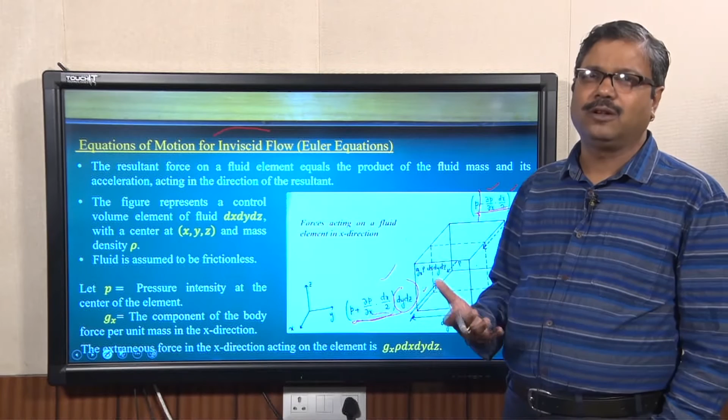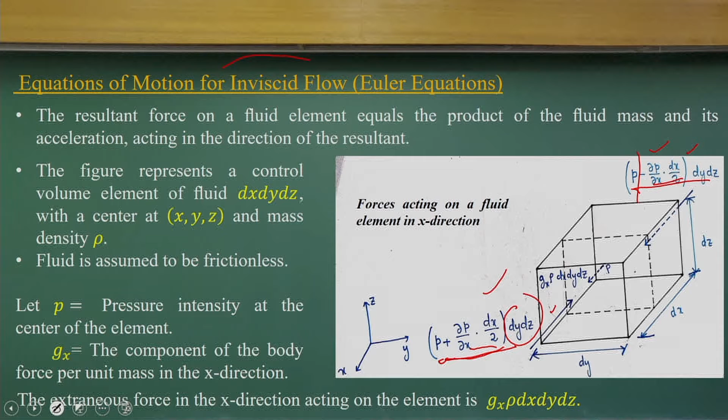Using Newton's second law of motion, the sum of forces acting is equal to mass into acceleration, which we know. So the same thing we have applied for this control volume, as it has pressure variability and velocity variations. Considering that control volume, we got these derivations. If you look at it, it's a very simple derivation: the pressure force equated with the gravity force component, that is equal to mass into acceleration.

The acceleration component has a local acceleration and a convective acceleration. More detail about local acceleration and convective acceleration you can follow in any fluid mechanics book on fluid kinematics, and try to understand how interesting it is to know what local acceleration and convective acceleration are.

That is equal to the force due to pressure imbalance, per unit mass, that is the reason we have this term. Then you have the gravity force component. Since it is three dimensional, in three coordinate directions, we can write this using the same Newton's second law.

So we can have three linear momentum equations, the only difference between these being the first one for the x direction, then y direction, and z direction. If you look at u, v, w, those are the things changing, and the pressure gradient is in the x direction, y direction, z direction, with the acceleration component in the x, y, and z directions. It's a simple force equals mass into acceleration, which is what we have applied.

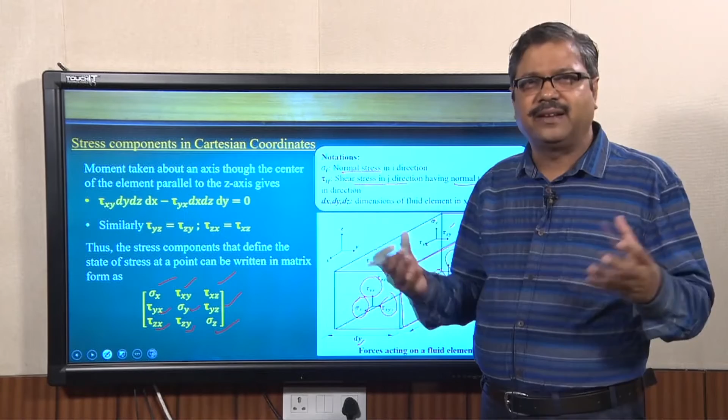So for any infinitely small control volume, if you consider dx, dy, dz, we can define the stress components on all 6 facets, all 6 surface facets. This is valid for solid mechanics and also valid for fluid mechanics. So for any small solid object, you can define the stress field like this, the stress tensor with 9 components.

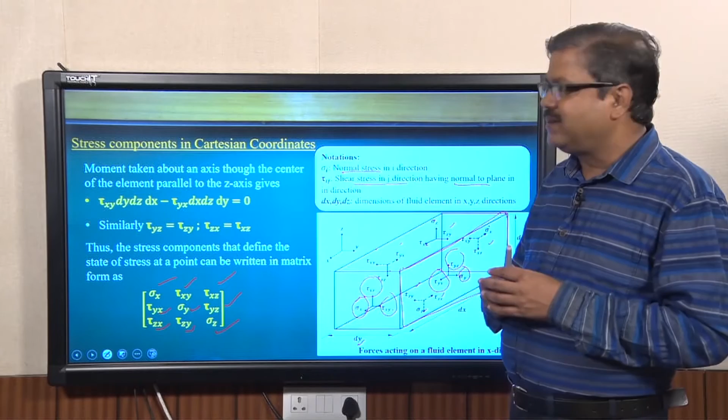But in some cases, if I take a moment about the axis through the center of the element, I can write this part, which means I am equating the moment. Going through the axis at the center of the element, I get force into distance, force into distance. If I equate this, I get tau xy is equal to tau yx.

The same concept can be used for other facets to find tau yz equal to tau zy, and tau zx equal to tau xz. So that means instead of 9 components of the shear stress matrix, we only need to consider 6, because the other 3 are equal to these.

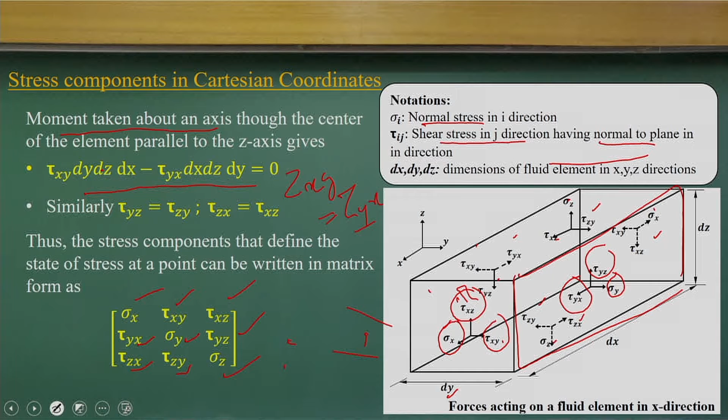So tau xy is equal to tau yx, tau xz is equal to tau zx. So we only have 6 unknown stress components. That is the simplification we do for this infinitely small control volume.

Now if you understand this concept, it becomes very easy to derive the Navier-Stokes equations, because we have considered an infinitely small control volume, and over that we have defined the stress field. Now we have to define it. The stress fields we defined in 6 components are also continuous functions within that. So again we can follow the Taylor series approximation for different facets, to find what the value would be if we know it at the centroid.

For example, if you look at these figures, I am looking at the sigma x variation at a distance of dx by 2 on the surface. If sigma is known at the centroid of this infinitely small control volume, then at dx by 2 distance it will be sigma plus the partial derivative of sigma with respect to x times dx by 2. That is the Taylor series approximation.

Exactly the same way as we did for the u and v components, we do the same approximation for sigma as a function varying in space and time: knowing the centroid value, we can find the value at dx by 2 on the positive side or dx by 2 on the negative side. This means we can know what force components are acting in the x direction, including normal stress components as well as shear stress components.

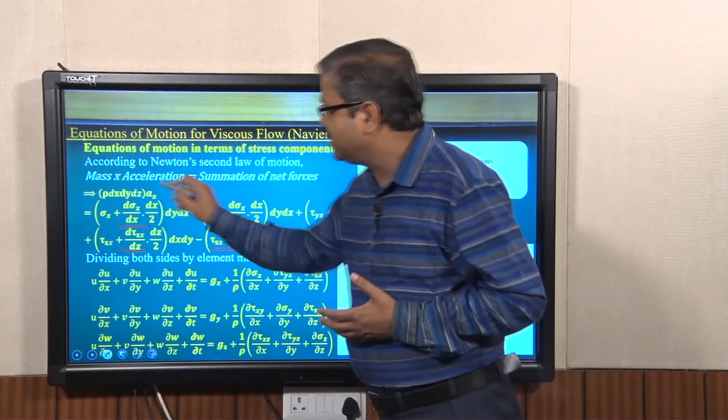That should be equal to mass into acceleration. Let me summarize what we have done. For the same small control volume, we are trying to write

or trying to apply Newton's second law for that control volume, where we are considering the stress distributions, and from that stress distribution we are trying to find out what is the force acting along the x direction. That is what we are doing. That is what will be the mass into acceleration in the x direction. That is what we have done. Simple things, the same Newton's second law of motion, nothing else, but we have applied it for an infinitely small control volume with a stress distribution representing a force acting on this surface and also the gravity force. So if you look at that, if I simplify these equations, I will get this part.

So that means again we are coming back to the equations which will have local acceleration and convective acceleration terms. Then we have terms in terms of sigma, tau yx, tau zx along the x direction.

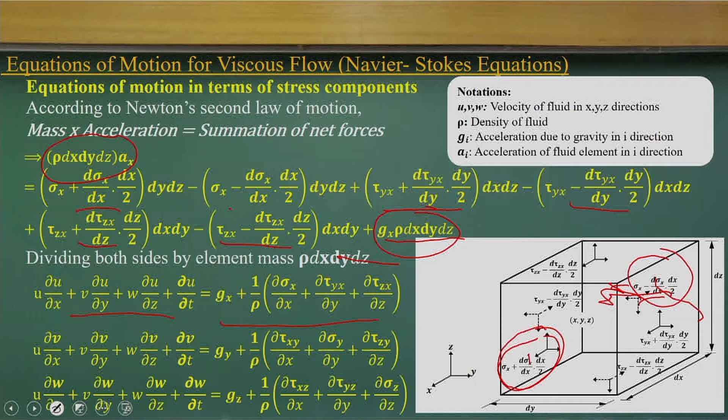Same way, looking at these equations, you can write what could be the equations for the y direction and the z direction. It is a simple thing, just look at these equations and you can write it. If I try to write the equation of motion along the y axis, instead of u I can use v, instead of gx I will use gy, and in a similar way I can write the corresponding stress components. Once I write the y axis equations, I can write the z axis because all are similar, only we are changing the velocity field and the gx, gy, gz components and the stress components.

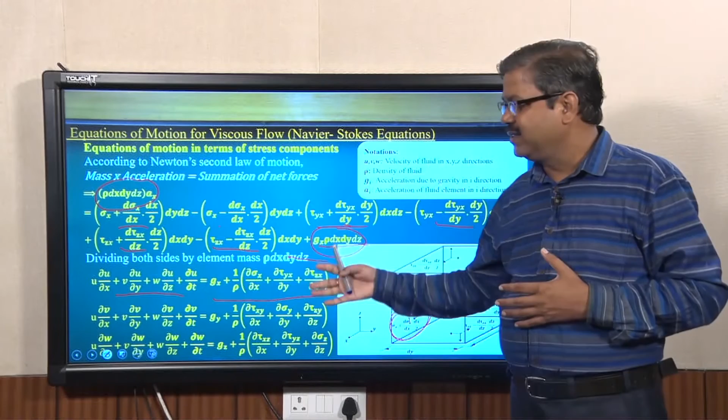So that is the basic concept, just to apply Newton's second law into these smaller control volumes where we have defined the stress continuum, and on that basis we have derived these components. So try to understand this, and I'm encouraging you to write the equations yourself, so that you can feel how it's coming out.

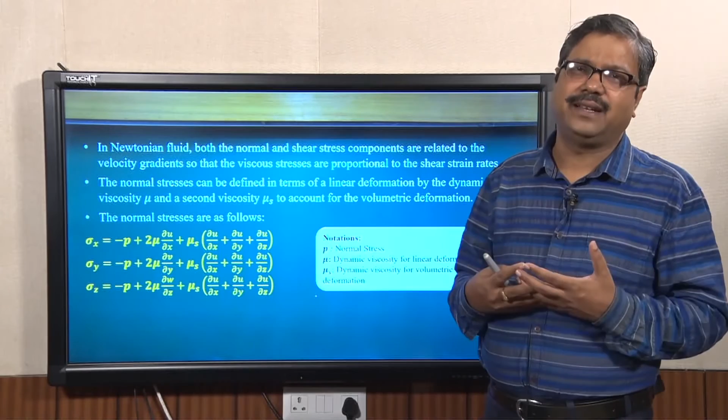Now, if you look at that, still we have written the equations of motion in terms of acceleration components and in terms of the stress component. We have not written it in terms of velocity gradients. So to reduce the number of dependent variables, we have to write the stress in terms of velocity gradient. As you know, from Newton's law of viscosity, the shear stress has a linear proportionality to the velocity gradient or the shear strain rate, for a Newtonian fluid. The fluid obeys that law.

So if you look at that part, that means again I can derive these stress components in terms of velocity gradient, that is Newton's law of viscosity. So if you look at that part, it is saying that these normal and shear stress components can be related to the velocity gradient. Viscous stresses are proportional to the shear strain rate, which is there in Newton's law of viscosity.

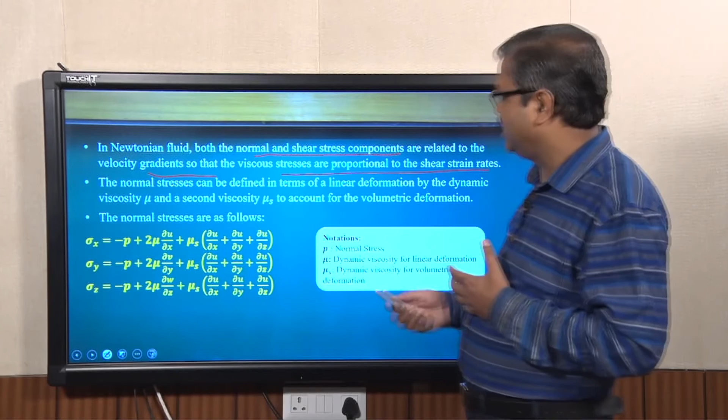If you look at that, now what is the problem? The problem is not a one dimensional problem. This is a three dimensional control volume we have considered. It will have two deformations: one is linear deformation, another is volumetric deformation. So we need to consider the stress due to linear deformation and the stress due to volumetric deformation. That is what we consider with the dynamic viscosity, and the second viscosity we just introduce it, it is not the dynamic viscosity, it is another viscosity which considers the stress due to volumetric deformation. Any object, when you have a stress field, it will go through linear deformation as well as volumetric deformation.

Without going into more details, the normal stress in the x, y and z directions can be written in terms of pressure, velocity gradient, and volumetric deformations, involving mu s. Mu s stands for second viscosity. Please go through an advanced fluid mechanics book to understand why we have these two factors, why we have a plus and minus, and try to have a visualization.

Now I can derive the normal stress in the x direction as a function of p, the pressure, the velocity gradient representing linear deformations, and the volumetric deformations. That is what I can write. The same way I can write for sigma x, sigma y and sigma z.

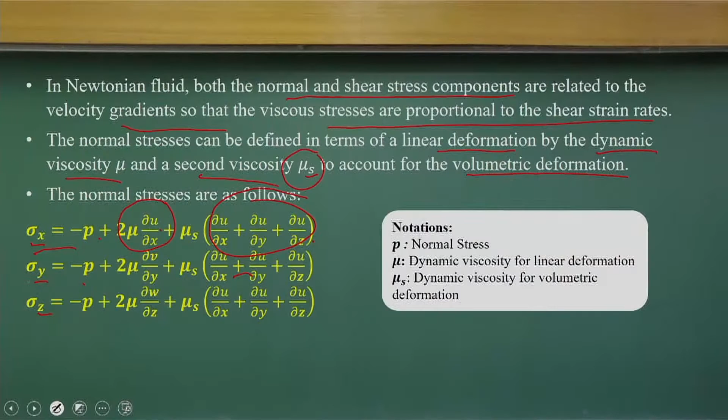So normal stress components we have written in terms of p and velocity gradient, with proportionality constants: mu is the dynamic viscosity and mu s is the second viscosity, which takes care of volumetric deformations and the stress generated due to volumetric deformations.

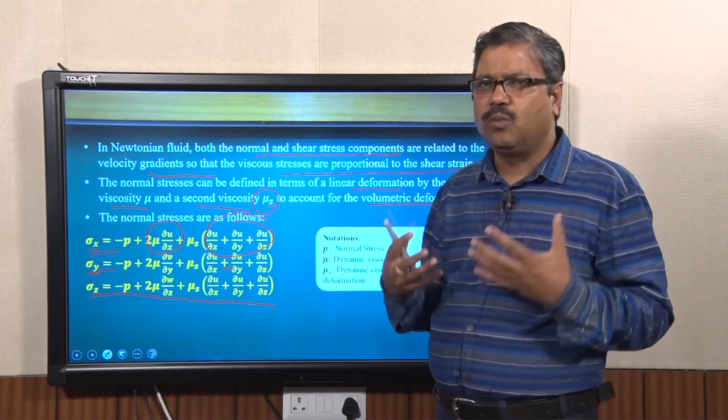Considering that, let's go to the next level and look at what happens to the shear stress component. Any fluid kinematics chapter, if you go through it, can easily write the shear stress component in terms of the velocity gradient, with mu standing for dynamic viscosity. So we can write it.

Then the Stokes hypothesis says that the second viscosity effect is small, not significant, because of volumetric deformations, so it will not be that significant. We can approximate it as minus 2 mu by 3.

Similarly, the pressure we can quantify as the average normal stress, and the negative sign indicates it acts in the opposite direction of the stress field. So if you look at it, you have sigma x, sigma y, sigma z, and one-third of that means you are summing up and averaging it to compute what will be the p.

Just to look at it, if my infinitely smaller control volume with dx dy dz is tending to zero, what will be the average normal stress, which is equal to the pressure, and to take care of direction we have introduced the minus sign.

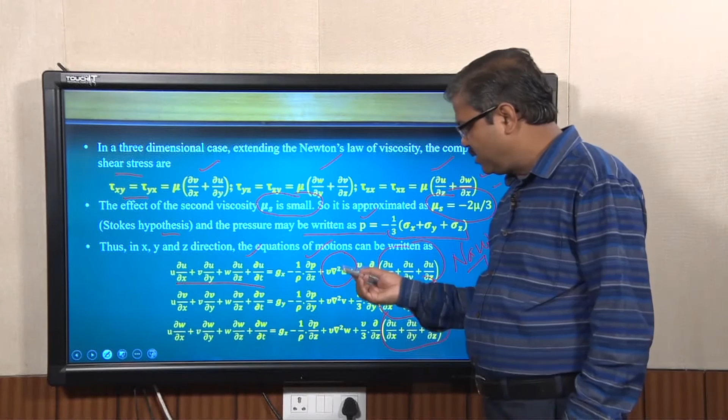In the Euler equations we have an acceleration component, a component of gravity force, and force per unit volume for pressure unbalance, but now we have introduced the viscous effect. That is what you need to try to understand.

This is what we have considered as the viscous effect, the Laplace equation of u, and this part is the volumetric part. So if you try to understand, this is the part we have introduced in the Navier-Stokes equations as additional components to the Euler equations. As we consider the fluid has viscosity, and that frictional effect, if we consider it as linear deformations and volumetric deformations, we can make these additional components.

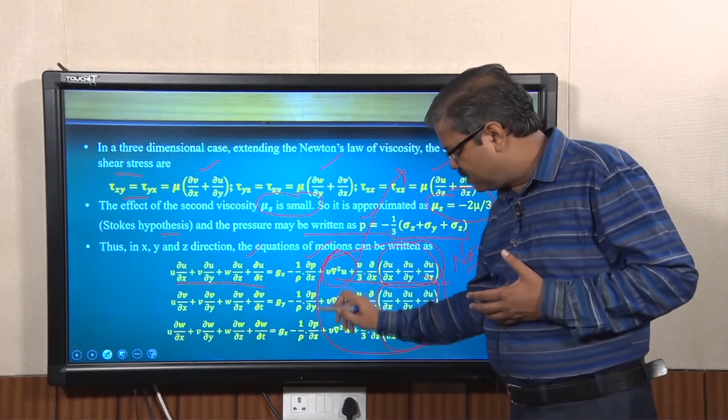I'm not going to discuss all the computational fluid dynamics details about these equations, but let me summarize: we are again getting nonlinear partial differential equations with more nonlinear components, like Laplace second order components. So, the more complicated equations we get as nonlinear partial differential equations to solve fluid flow problems considering the viscous effects.

And here also we have 4 dependent variables. They are velocity u, v, w scalar components, and the pressure. But we have 4 equations: 3 linear momentum equations, 1 continuity equation. So considering that, we can solve it, and today it is possible to solve it.

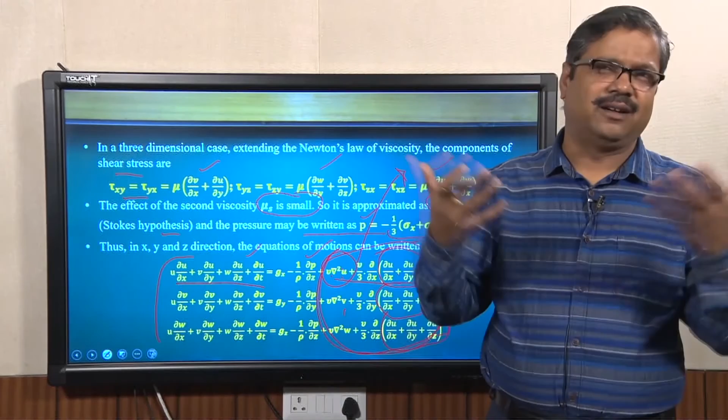There are a lot of solvers for the Navier-Stokes equations commercially, many sources are available nowadays. You can get Navier-Stokes equation solvers. That is not a big issue to solve these equations, but they look very complicated in terms of nonlinear partial differential equations with 4 dependent variables u, v, w, and p, and 4 independent variables, the space coordinates x, y, z, and time. So, how to solve these things?

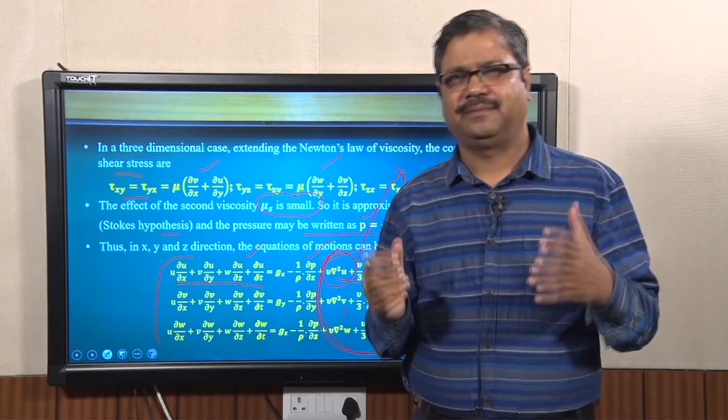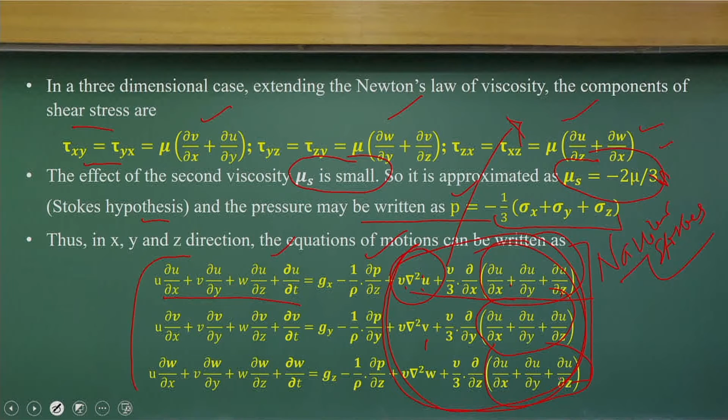I am not going to tell much things now. Let us come back and just solve these equations, taking an example problem. This example problem is considered from F.M. White's book, just to demonstrate that we can use these equations to get analytical solutions for a fluid flow problem.

Let us consider incompressible flow, where density does not vary with time, and the velocity field is given. If you look at this velocity field, you can interpret many things, like the velocity field does not have time components, it has only x and y, there is no z component, and w is equal to 0. You have to consider this before solving the problem, because when you try to get analytical solutions, you try to understand what type of velocity field is given to us, and the density field. Density says it is incompressible, meaning density doesn't vary.

So, considering that part, we have to determine under what conditions we are looking at the solutions of the Navier-Stokes momentum equations. If this is the velocity field, what is the pressure field we are looking at, or does this velocity field satisfy the Navier-Stokes equations? That is what we are looking at.

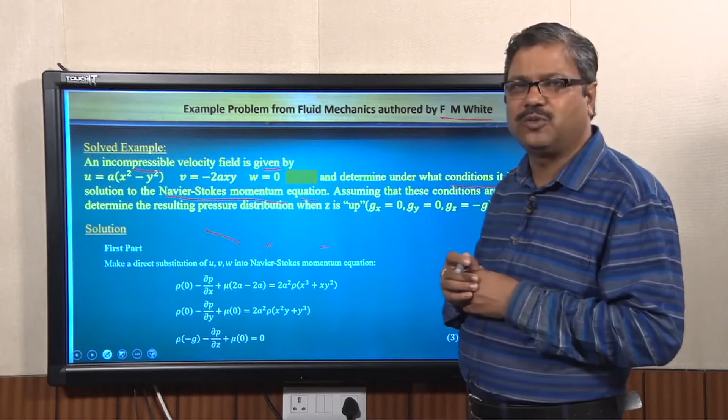So what we do is apply the Navier-Stokes equations and substitute all the terms here. We compute these in the Navier-Stokes equations for the x, y, and z directions, substituting all these things - first partial derivative, second partial derivative with respect to x, respect to y - then we substitute these values and try to find out what these three equations will be.

If you look at these three equations, you can find that this equation is very simple, because we can integrate it. It does not have any component, so we can integrate these with this, we can get it.

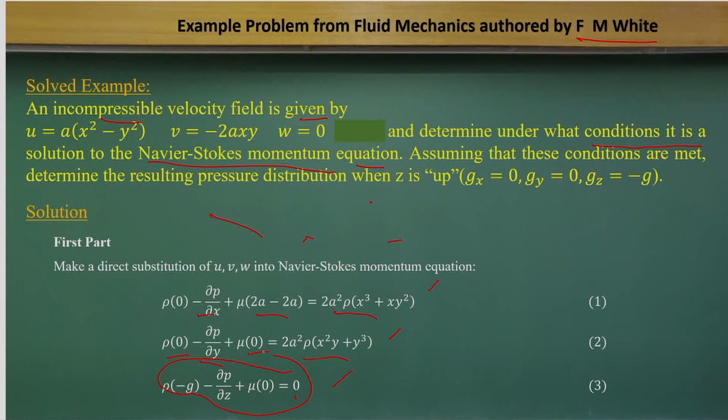Next part: if you integrate it, you can see this pressure is varying like this. But there is a constant which is maybe a function of x and y, we do not know it. Second point: we have integrated one equation to get what could be the probable solution, with an unknown function f1(x, y). Is it correct? So what do we do?

Again we use these equations to check whether the other two equations are satisfied. That is what we did - differentiated with equations with respect to y and with respect to x, then compared, and we found these are also the same values. That means this velocity field given to us satisfies the Navier-Stokes equations.

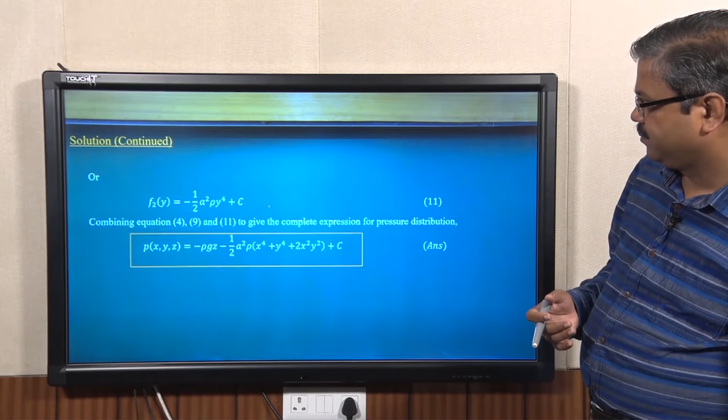Now we are looking at what could be the pressure field. Again these are all just differentiations and integrations to find out what the integration constant values will be.

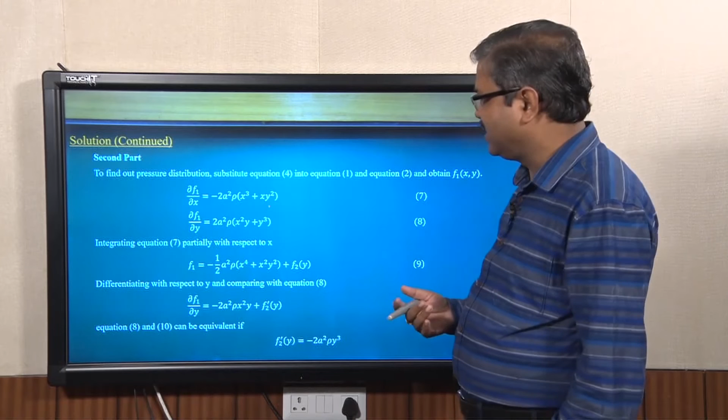That is the reason we substitute equation 4 into equation 1 and equation 2, and obtain what f1(x,y) will be. Once you know f1(x,y), we integrate it and do the differentiation. We still get the value f2. Now we substitute it, which gives us the pressure field. This part we obtained after integration and differentiation of the previous equations, and that is what gives us the pressure field.

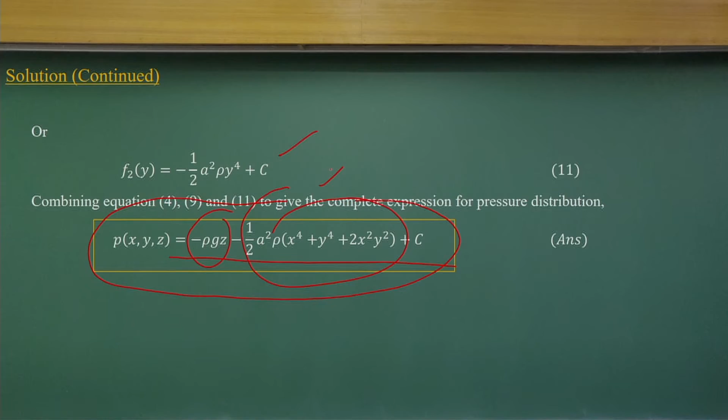We satisfy the velocity field and pressure field for the flow domain where the Navier-Stokes equations hold good. Before completing these things, I want to show that similarly we have applied the Navier-Stokes equations for fluid flow problems in channels. We often put small obstructions like porcupine structures, river training works, to see how much effect it has in terms of velocity reduction. That is what we try to study with 3-dimensional models, which have the Navier-Stokes equations with depth integration.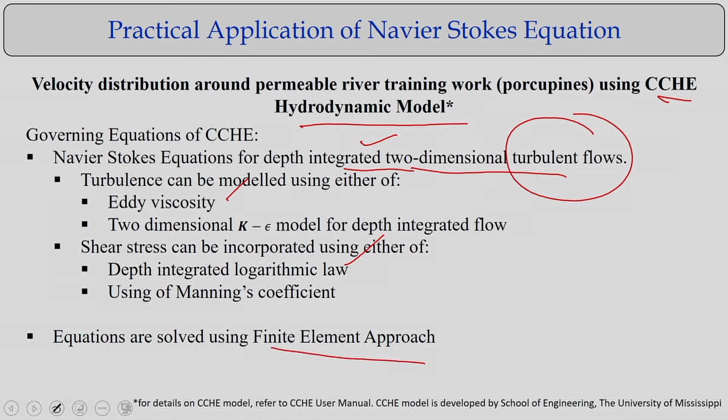The turbulent flow, which will come at later runs, will have an eddy viscosity, K-epsilon model, and depth integrated logarithmic laws, solved using a finite element approach. That solution gives us confidence that we have put the structures correctly here.

We try to measure the velocity using numerical models, and if you look at these velocity distributions, this is the velocity distribution measured from flume experiments. You can see there is a velocity reduction because of these obstructions. This is clearly visible from the upstream velocity distribution and the downstream velocity distribution. There are significant velocity reductions happening in both the experimental data and the numerical modeling of the Navier-Stokes equations.

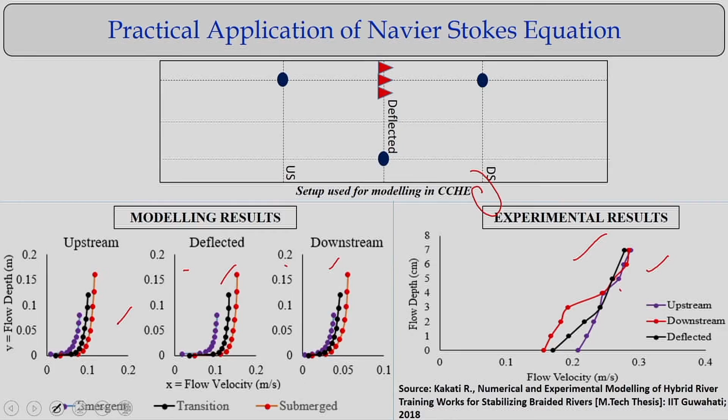So it is now possible; there are models available which solve the Navier-Stokes equations with some approximations, like the depth integrated concept with turbulent structures. We can get solutions like what we have done for a river training work having porcupine structures, small obstructions, and see how much velocity reduction is happening. Similarly, you can look at how much velocity reduction happens at the experimental level. These things we can conduct, and it is possible nowadays using Navier-Stokes equation solvers.

Let us come back to derive the momentum equations for river flow, unsteady gradually varied flow. We will look at the variations in both the gradually varied and unsteady flow.

If you look at a river as considered here, this is the bed, this is the free surface, and there will be the energy gradient line - this is the hydraulic gradient line. If I consider the channel making angle theta, the river is making angle theta with the free surface and the energy gradient line. The slope of the energy gradient line we define as SF, and we define the slope of the bed as S naught, which is equal to tan theta.

But the geometry of the cross section of the river can be complex, as we are looking at an area integrated concept. It can have a shape like this, where the free surface is here, and ZC is the centroid point where the pressure acts. In this field, P has variations, the pressure acting on this field has variations, and the area A also varies. So P into A also has variability. Pressure into area is the force, and this force is also considered to vary along the x direction - along the x direction, the force into area varies.

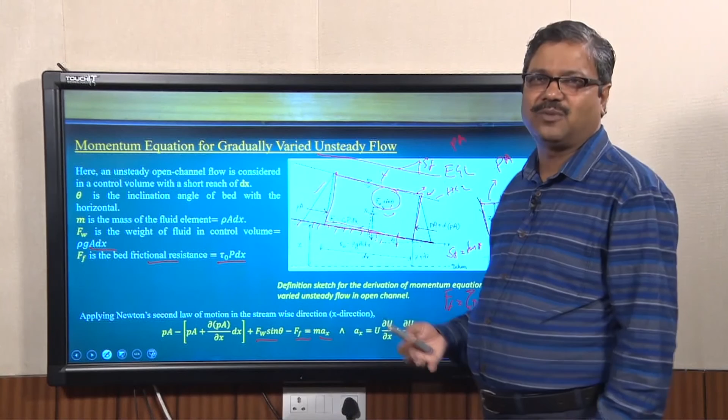At a free surface there are no force components; we have considered this hydrostatic pressure PA as a variable, and we find out the frictional resistance force and all. So the sum of the forces equals mass into acceleration.

The acceleration component we define only in this one direction as the area average u value. That is the local acceleration and the convective acceleration in the x direction. So we have a one dimensional equation in the x direction.

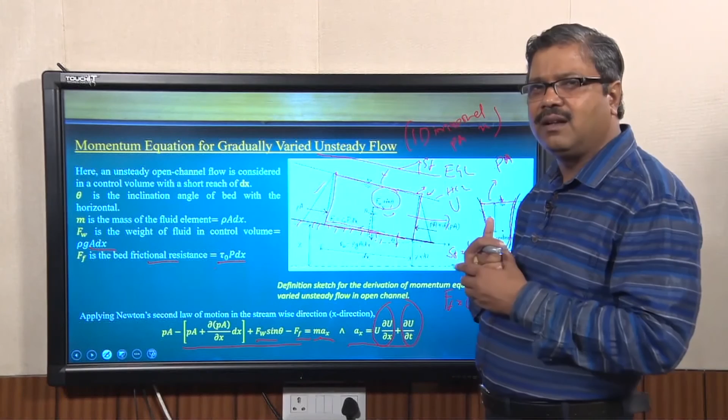The idea is to conceptualize a river where we look only at the longitudinal direction, not considering much of the lateral direction or depth variations. We look along the longitudinal direction at how these force components act, using the area average velocity, the local acceleration, and the convective acceleration terms.

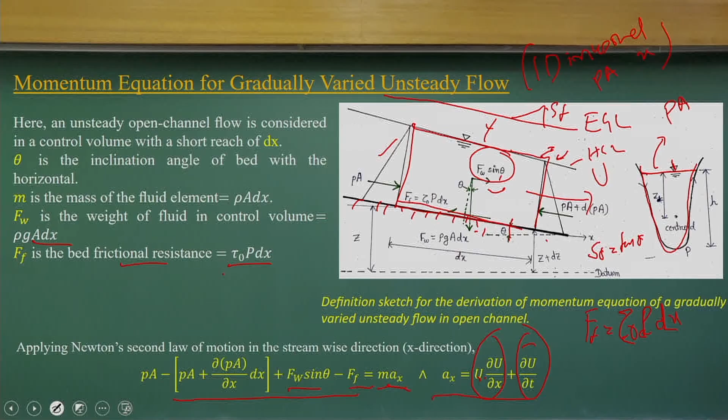Now we have to simplify these equations. If you look at this part, we get the gravity force components and the bed shear force components, along with the acceleration components. Just rearranging these equations and dividing by the weight of the fluid, we get the equation for this part.

In this equation, it is quite interesting to know this value. We know S naught is the bed slope, SF is the friction slope, and we have the local acceleration component and the convective acceleration component, with bed shear stress defined in terms of friction slope. This relationship between bed shear stress and friction slope can be found in any open channel book using a small control volume.

If I try to find these values with the approximation of hydrostatic pressure distribution, this component finally equals del H by del X. That is why this is a quite interesting approximation, where we have considered a hydrostatic pressure distribution.

Since it is a hydrostatic pressure distribution, we can compute the pressure at the centroid of this area, and simplifying this, we finally get this component as nothing else but the gradient of the flow depth. H stands for the flow depth here, so this gives us the gradient of the flow depth component: the bed slope component, friction slope component, local acceleration, and convective acceleration component.

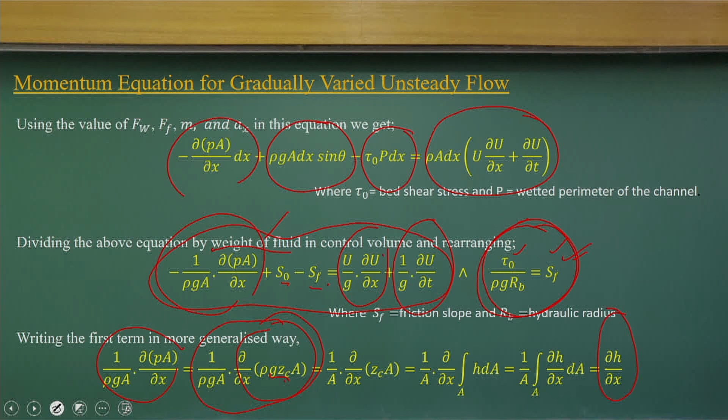Now, if I substitute all these, I get the equation known as the Saint-Venant equations, and this relates to the Manning's equation as well. More detail about the Saint-Venant equations we will discuss in the next class.

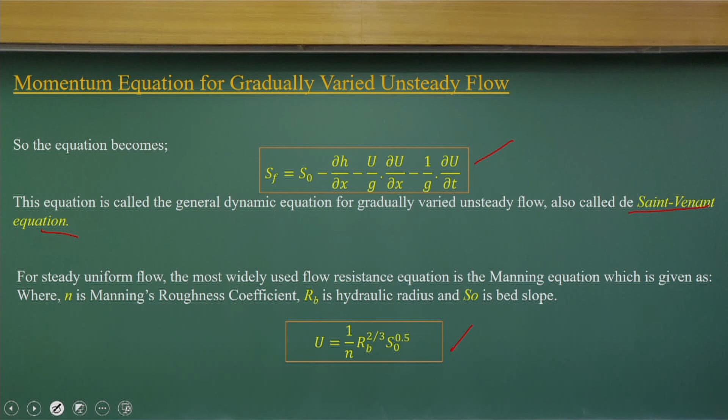To conclude, we definitely do a lot of things to try to understand rivers, but try to understand this quote: a good river is nature's life work in song. Just try to understand what you mean by rivers. We try to frame rivers in mathematical forms, but still our knowledge is limited for natural rivers. With this, let me conclude this lecture.